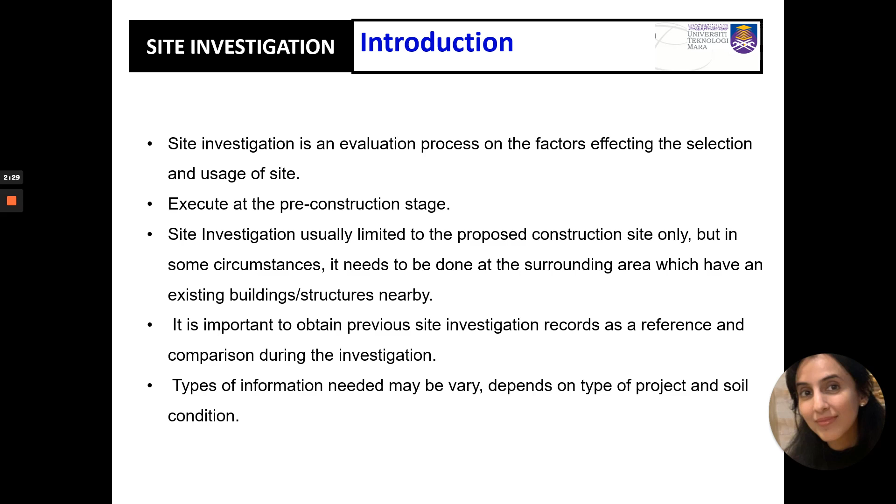The importance of site investigation is that it tells you the actual condition on site. When you visit, you will know the problems on the site, and you can foresee what needs to be done so that you don't encounter the problem later. So you identify all the problems at the beginning so that you can solve them.

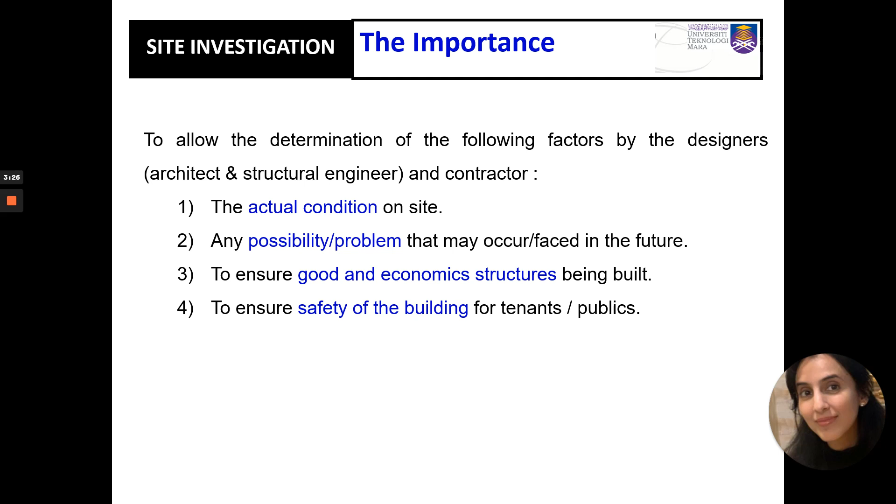This is to ensure a good and economic structure is built, and to ensure a safe building for tenants, the public, and the stakeholders. So when you build something, you need to consider whether it's safe - the ground, whether you have high water tables, and so on.

The objectives: firstly, you need to know the suitability of the site and the environment for the proposed works, including implications of previous use or contamination. So if the site has been used before, maybe for plantation, you may have contaminated land or soil. So what needs to be done? You need to understand that when you visit the site.

A very simple example I can give is, our parents sometimes want to buy a piece of land to make a garden, plant durian trees - musang king, or maybe duku trees. So to plant durian trees, you need to know whether the site is suitable. You go and buy a piece of land at a developed area, maybe near a housing estate where there's one empty lot. You want to buy that. It's a residential lot, but you go and plant durian trees there.

It wouldn't be wise for you to do that, because the first thing is the title of the land. Then later the neighbors will have a problem. When you have a garden, you will invite many animals - you will have snakes and all those sorts. So it may not be suitable.

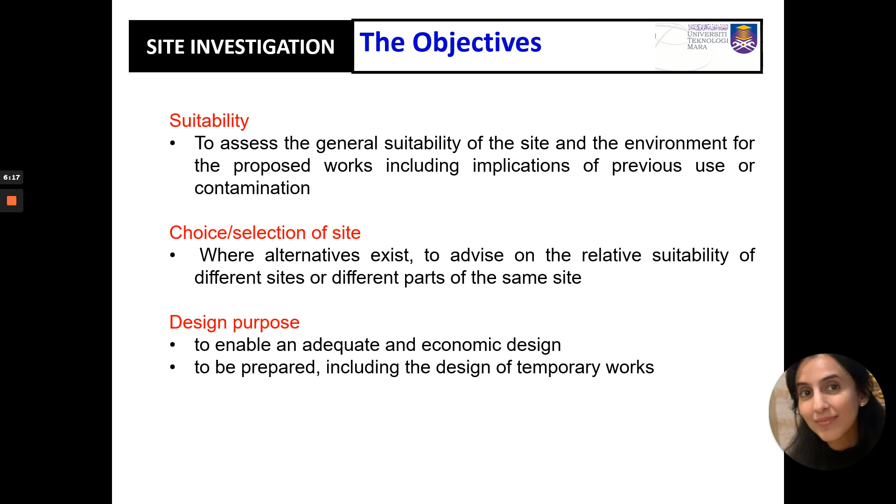Construction methods: when you visit the site, you may encounter different types of soil. Just in a piece of land, you may have non-cohesive and cohesive soil, or very highly disturbed soil, like muddy soil. So your method of construction will be different, like excavation, as I explained in the previous chapter. Excavation for non-cohesive and cohesive soil may be different, as I've explained.

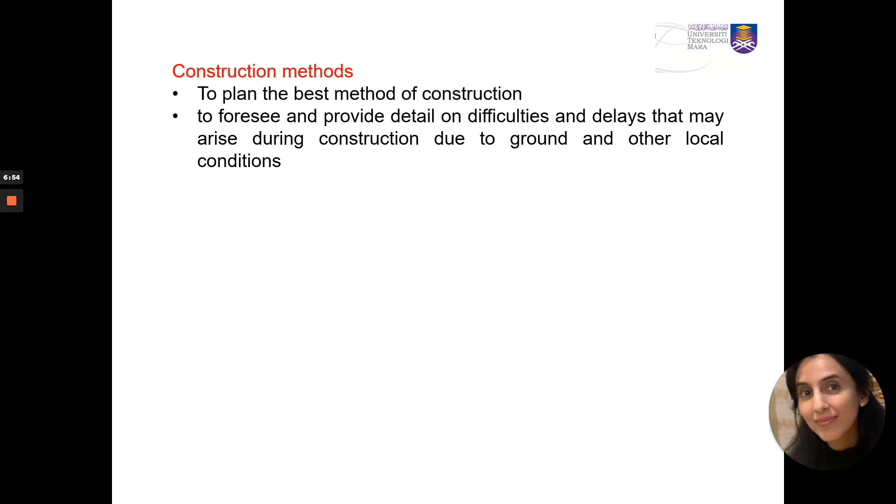Determine effects or changes: to determine the changes that may arise in the ground and environmental conditions, either naturally or as a result of the works. So if you do something, that project may cause a landslide, for example. So when you do excavation, do you need extra work because your site is a bit hilly? If you make a slope, do you need slope stabilization for that site? Whatever you do now may result in changes later, so you need to identify that, and the effects of such changes on the works around you and the environment in general.

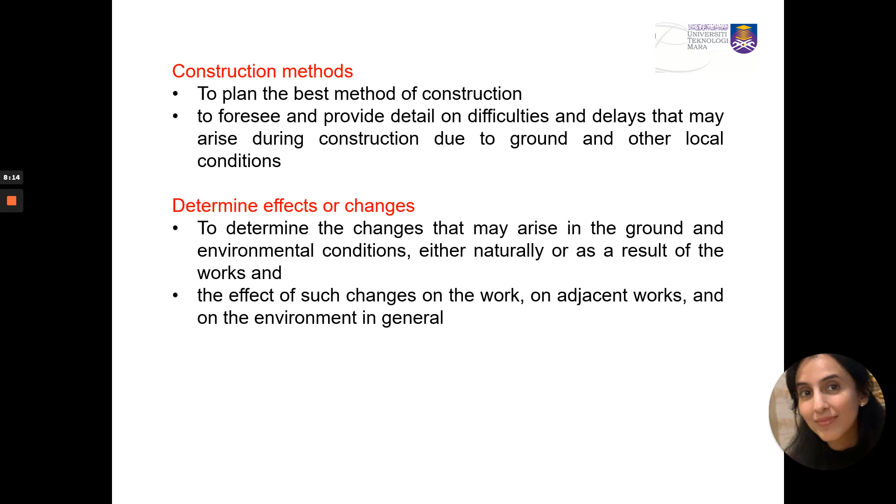So if you do a project, would that disturb your neighbors? For example, if you do an agricultural project and build a goat pen, although it's far from other people, would that disturb the neighbors or the adjacent farms? You need to see all that.

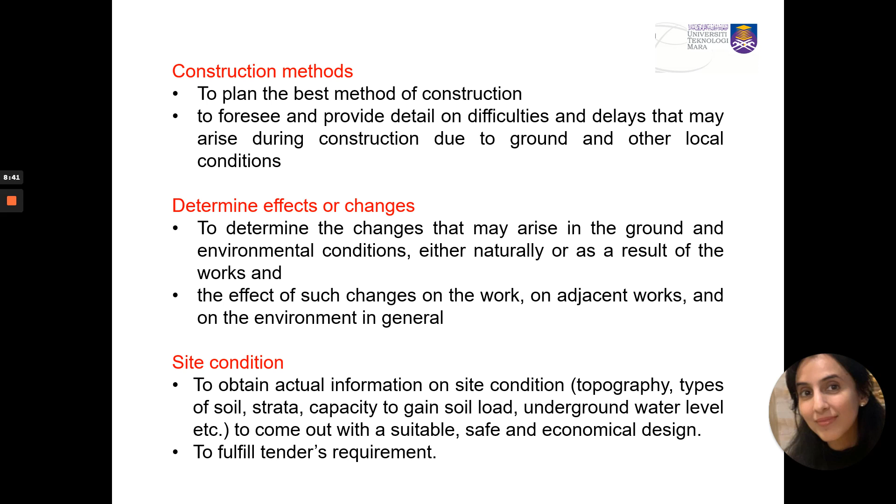Site condition: the topography, the types of soil, the strata, the capacity, underground water level - that has to be done. Soil investigation is normally done after the site investigation, but during site investigation you can have a rough idea. Go and visit, and you can see whether it's sandy or cohesive.

If you don't do a proper site investigation, the first effect you may have is failure on the structure. You may have cracks on the wall because of settlement, where the ground sinks on one side - we will learn this more in soil improvement. If your soil is not strong enough and you build a very big structure above without proper foundation, your building may collapse or crack. If you didn't recognize there was a river underneath your site and built a structure, the same thing may happen.

A structure which is almost complete may need to be demolished and rebuilt. So you've finished building, and suddenly you find something isn't suitable. In the old days, they could actually lift the house because the foundation was just above the ground - that was a traditional house. But now we're talking about things where you've done the piling, and suddenly find out it's not suitable. There were several cases like that when they did piling because they didn't do a thorough soil investigation.

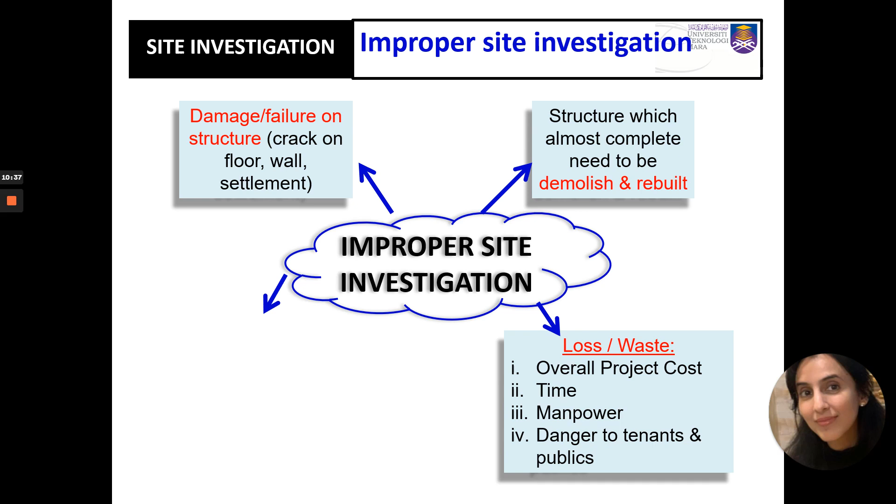So the piling becomes unstable, resulting in lost or wasted overall project cost because you have to demolish it. Then you realize you need to do more work, like diverting a river, requiring more time, manpower, and creating danger to the tenants, the public, and stakeholders. And it creates social problems.

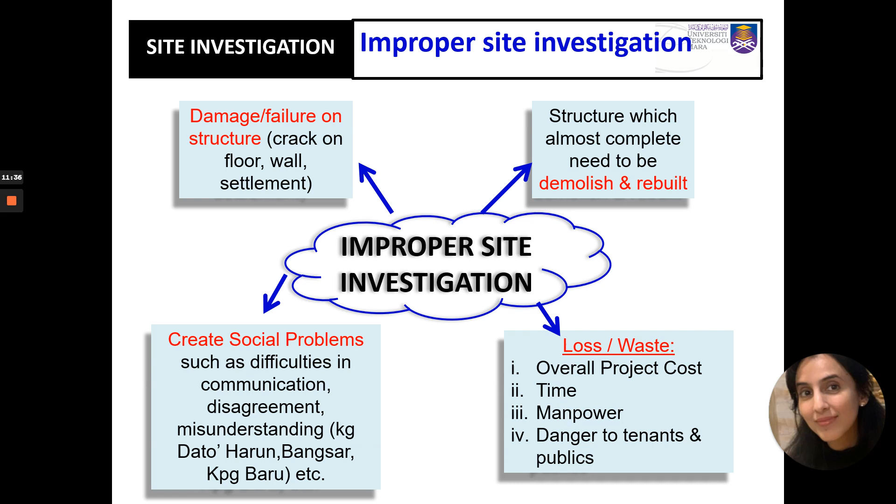This is what happens when you don't do a proper site investigation. So what needs to be investigated during site investigations? There are about 9 elements - you may have more or less depending on the situation, but I'm only touching on 9 of them.

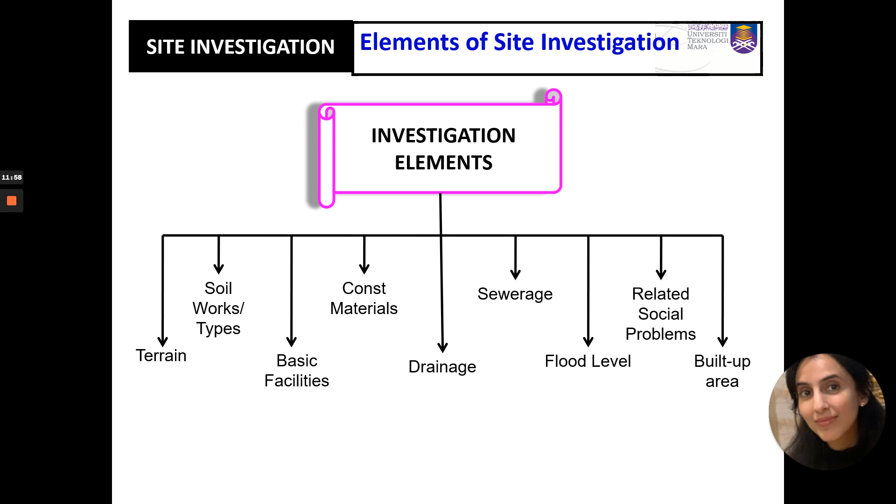The first one is the terrain - it shows you the shape of the land surface, whether it's flat, hilly, or swampy. It gives you an overall picture of the infrastructure works that need to be prepared before construction commences on site. If your site is a bit hilly, you need to provide several things on site. The site can be defined as flat, meaning you may have a 0 to 3 percent gradient - it's not sloped, it's flat.

Or it's hilly, more than 25%. Or you can have a piece of land at a developed area where the earthwork is already done, like with the MRT. When they did site investigation, MMC Gamuda did all the initial site investigation, but when the selected contractor came in, they went to visit the site during the tendering process. By then, the site they visited had already been flattened.

Sometimes the terrain of the site can also be described based on factors like being full of trees, having a river, or being rocky, like near Puncak Iskandar. If you drive through there before you graduate or take your degree, though now during corona time you're not actually here, if you go a bit further up towards Parit, you can see rocks on the site, brown in color.

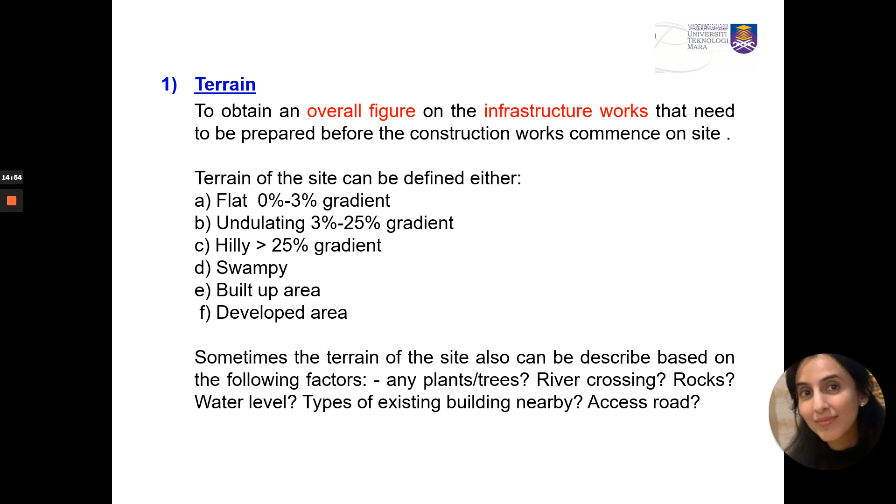Existing buildings, for example, if you go to Institute Latihan ILD, or UITM in Kampung Gajah, on the site they have new buildings and old buildings. So for existing buildings, when they got that site for the institute, they already had existing buildings there. They only use part of the land to conduct trainings for us, but there are parts of the land they don't use. You can see some old buildings demolished, some in really bad condition because they don't use those old buildings anymore. So you can describe the terrain that way as well.

The second factor is the types of work. The first thing you've seen is bentuk muka bumi, the shape of the land. The second one now is the types of work. So when you go to the site, it's important to determine the type of soil on the proposed site, whether it's sandy, rocky, swampy, watery, has abandoned mines, or very muddy.

So when you go to the site, you can discover this with your own eyes, mata kasar. Examples of considerations you need to take: whether it's a big project, whether your project is really huge, so you have to visit thoroughly, and you need specialists and geologists. You need to do soil investigation, a preliminary soil investigation.

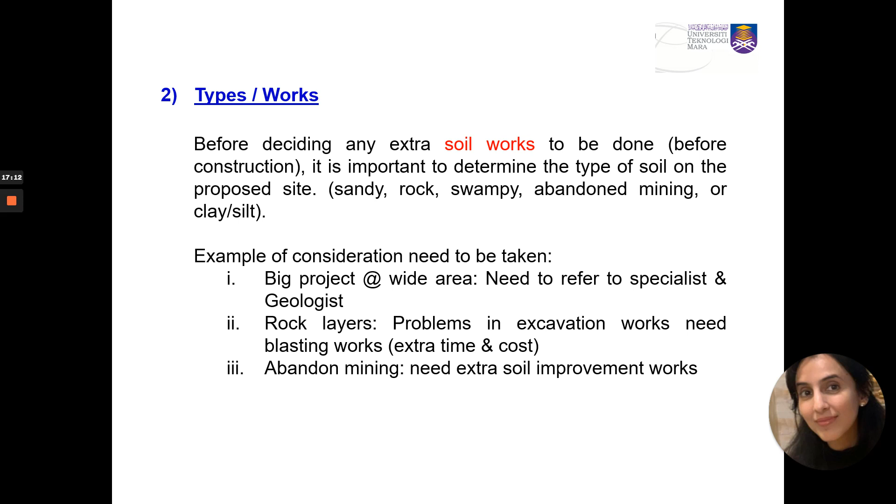Then there's the rock layers, which are a problem in excavation work. You may need blasting, different techniques, or you may not be able to use dynamite because of the surrounding areas, so you need to check. Abandoned minings, lumbung-lumbung, like around this area in Ipoh, we still have in Tronoh mines that people use for fishing ponds. We still have minings, and this needs extra soil improvement works. I'll touch on this more in the soil improvement topic, not here.

Then the types of work also includes the method of construction, to ensure that new construction work is safe and will not affect the nearest existing buildings. I've mentioned this before: workers and the public, factors affecting safety measures, soil excavation.

So when you do excavations, you need to see many things to reduce the risk. Vibration - when you do piling, we have vibrations, and when you have vibrations, the ground will have movement, and buildings around you will also get the vibration and may get cracked as well. Underground water can hit your foundation and make your structure very unstable on the ground, and it can collapse. That's what happened to the Highland Towers in Ulu Klang long time ago.

And you need to see whether the methods are suitable for the proposed site. Maybe your site is small - later when we learn about basements, we have different types of excavation depending on the site itself. Kalau kecil macam mana, kalau besar you have space, you can make a slope.

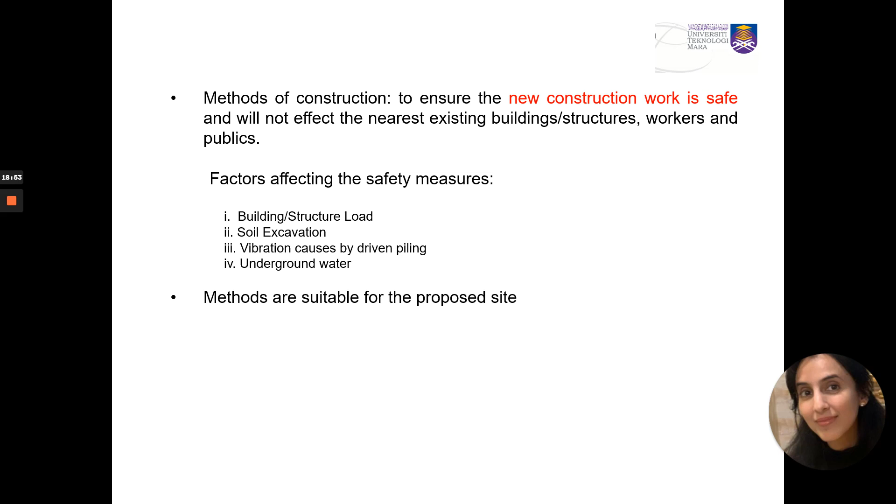Kalau kecil, you may not have space, you cannot do the slope. So choose methods that are suitable for the proposed site. You need to see your site, and you can actually have a rough idea when you do your site investigation.

The third thing you have to investigate is the basic facilities. Access road - this is very important. Is it available, or do we need to construct a temporary one to the site? If you have an existing access road, then it's good for you.

But if you don't have an existing road, you need to construct temporary ones, and then you need extra cost for that. Kalau selalunya nak buat kebun sebelah-sebelah dalam, you need access road. Sometimes you kena cross orang punya land, because nak masuk land yang reserve kerajaan, it's so far away. You need to turn like miles away to get into that reserved area, maybe susah. So you nampak ada jalan yang kena cross orang punya tanah. So you have to check.

Types of road - whether it's a paved road, or just laterite, or you only have a very rough access road, pakai crush and run. Factors need to be measured to estimate an overall cost for road works.

How long is the distance from the main road, ataupun from the road that is paved, to your site. This is crucial because if you have lorries, macam concrete lorries, to send your materials to the site, just imagine how long they have to transport the material. It will affect your cost.

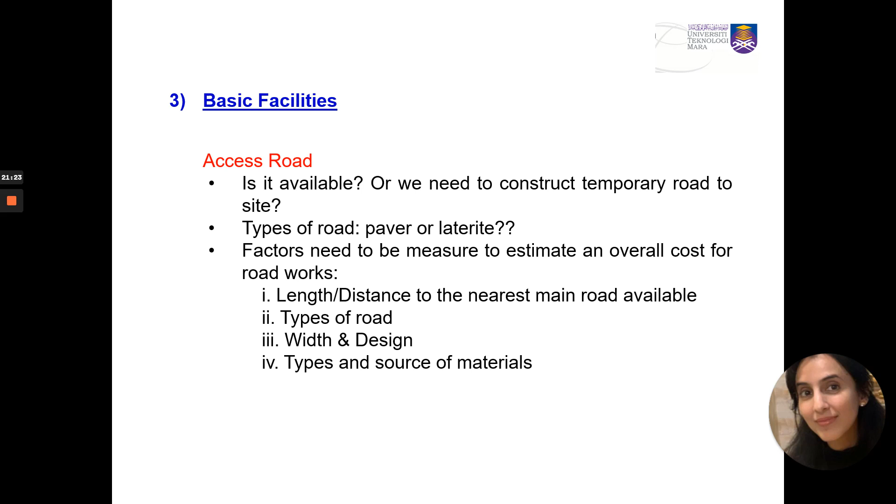The road from the main road to the site was only about 30 kilometers or something like that, he mentioned to me. But it took them hours to get to the site because of this type of road. It looks okay, but when you are on the road, it's bouncy. It's like you can't really drive fast. So they had to drive really slow, and it took them about 2 to 3 hours to get to the site in Sarawak. So you have to look at this.

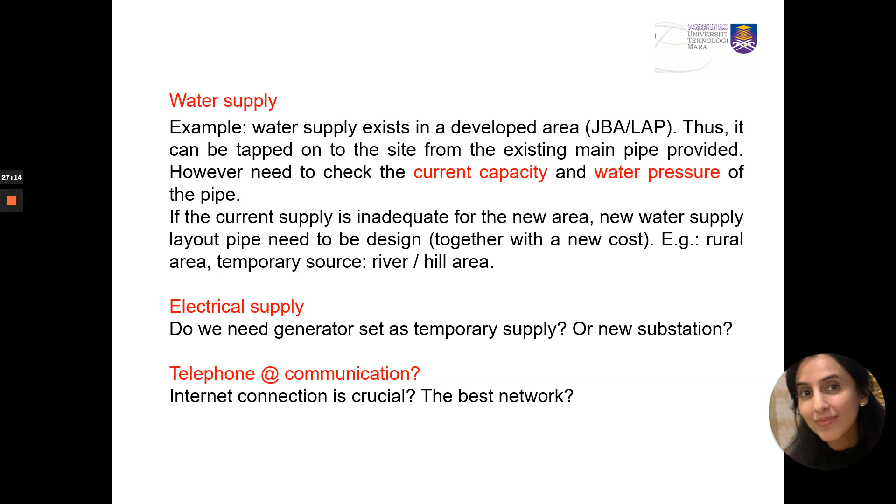So if your site does not have a water meter, you need to tap from your neighbor. You need to find your neighbor, you need to go and talk to your neighbor. They may request their water and electricity bills from you, like my mom's farm. We were the last to have electric and water supply.

So about a year ago, we had a new owner who leased the land behind, a China company. So he needed electricity and water. He came and saw us, asked can we have your bills, because TNB and LAP needed them. So we gave them our bills, and they actually pulled the water and electric from our last point.

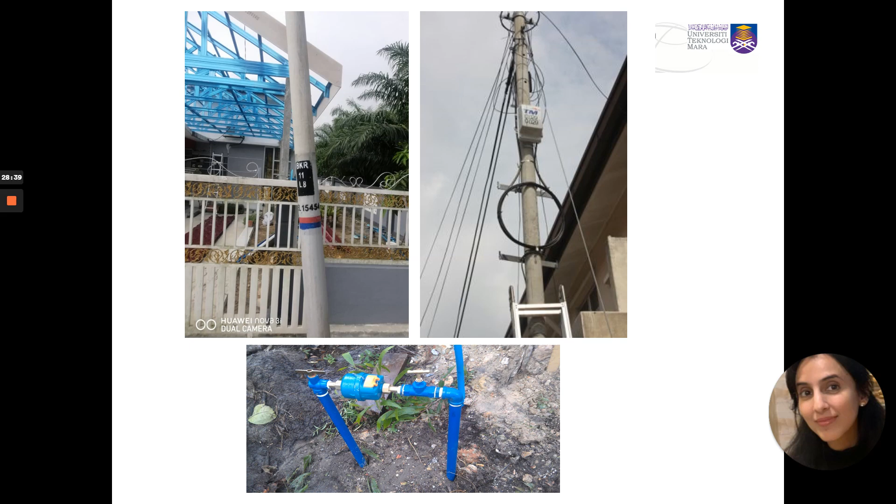Existing works, I've mentioned just now. If you have existing works, like I said, Kampung Gajah, Institute Latihan UiTM di Kampung Gajah, so they already have existing buildings. You need to investigate previous defects or failures that occurred on existing buildings. It is important to know the reasons of failures for better precautions and improvement in future.

So let me tell you a story. I was a core volunteer for Mercy Malaysia back in 2006. At the end of 2006, they sent me to Pakistan to do an important mission, because they had an earthquake.

This happened near Kashmir, Azad Jammu Kashmir, up near Bagh. When they had the earthquake, most of their buildings cracked and collapsed. There was a high mortality rate because people were harmed by collapsed buildings, rocks and all. I was the only lady from UiTM in Perak involved in this project. So we went there to build a new district health office.

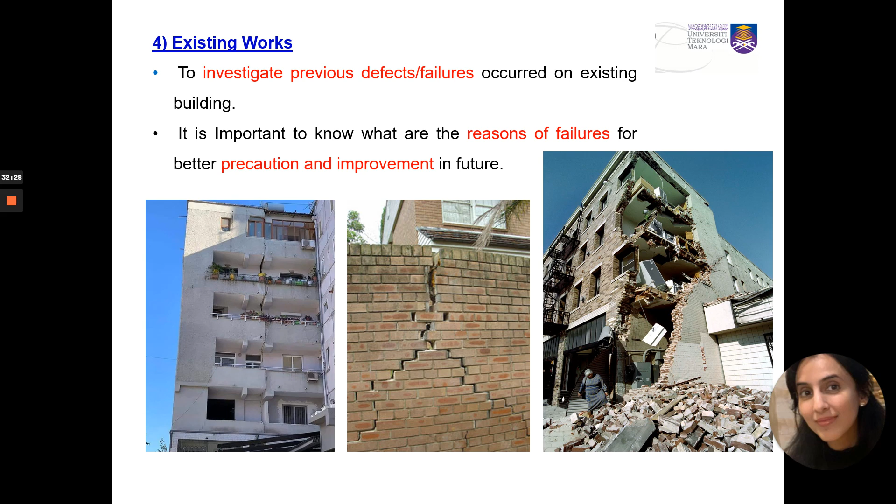Construction material. So when I did site investigation in Azad Jammu Kashmir, because it's at the top, from below we had to go up, it took us hours, I don't remember how many, but it was very long, and the road was very narrow.

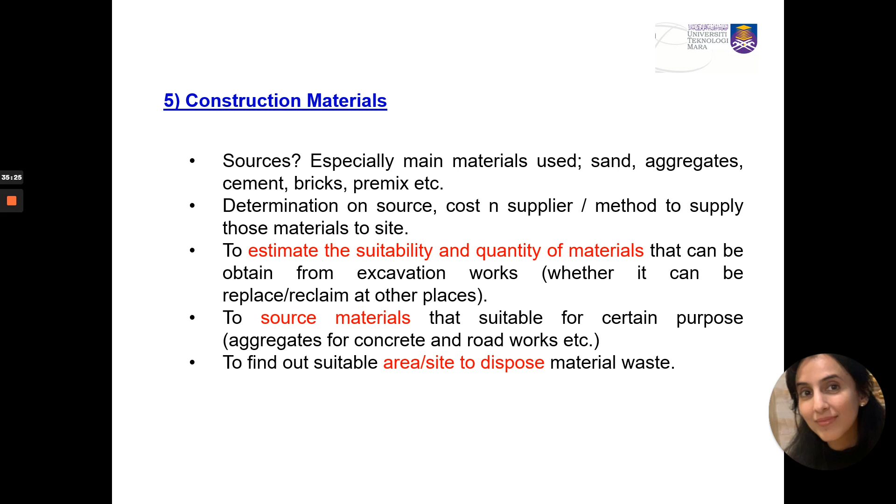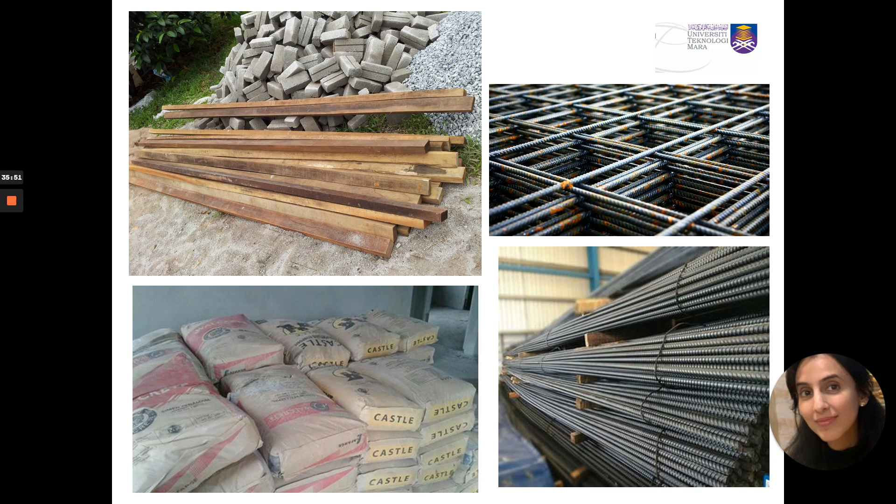So these are three main important materials in construction works. The first one is cement, and you have the aggregates, reinforcement bars or BRC, wood, bricks. So it depends what actually your project is all about. If you want to build a warehouse, maybe you won't use wood much, you'll use a lot of steel structure.

Drainage, this is also very important to determine how to flow water off site. Otherwise your site can suffer from flood. Is there any existing drain nearby? Can you connect your drainage system to the existing monsoon drain? For example, what is the nearest river to dispose this into?

I have seen several sites where, when they did construction works, they didn't have proper drainage. The site itself flooded during construction. Then only they scrambled to say the depth isn't enough. Whereas actually the flow of water didn't reach the river, their drainage system wasn't good.

It's the same thing. My students previously did an assignment. They did a small research between Penang and Terengganu or Kelantan. It was Terengganu, I think. So they found out that the drain in Terengganu or Kelantan, I can't remember which state...

They investigated and found out that the drainage in Terengganu was very poor because people there had their own individual piece of land. So when they had their own land, they built their own kampung houses, but they didn't build proper drainage.

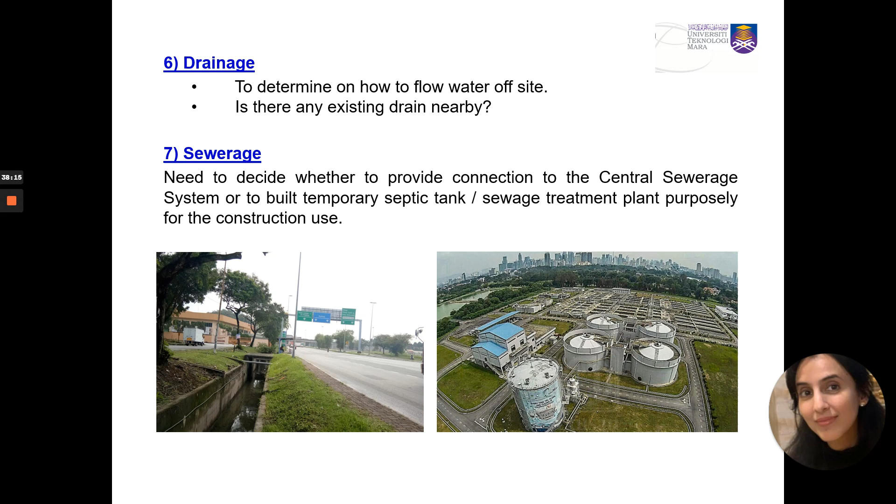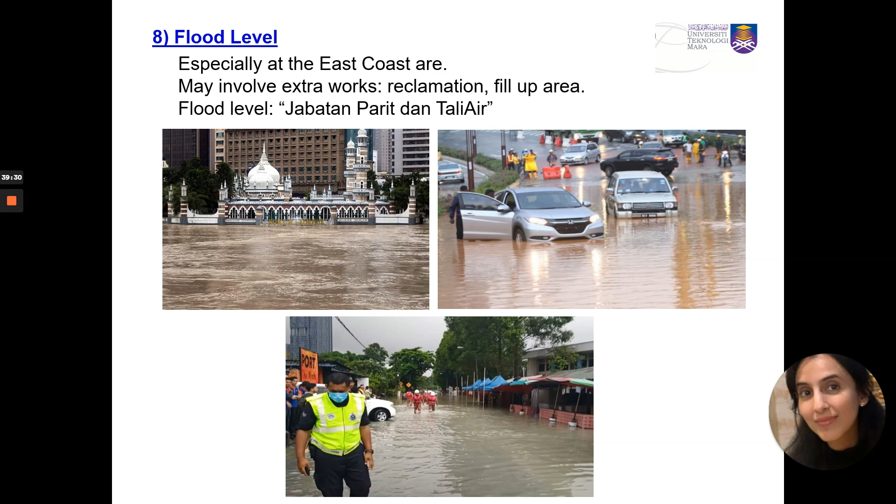Okay, related social problems. For example, in KL you have squatters who protest development in their area, like Kampung Baru that they mentioned. You may have so many kinds of social problems.

For example, my friend was a project manager at a construction site in Klang Pandamaran, an area with quite many issues. He said almost every week he, or the site, had to pay pocket money to the gangsters. Otherwise the gangsters would make lots of issues, theft, and even burn the front gate.

So they created so many problems, and my friend didn't want to keep paying them every week. So my friend went to meet the head of the village, the ketua kampung, and told him this is the problem in this area, we need to sort this out. It turned out the ketua kampung was also part of the gangsters.

So they had to negotiate. They paid a sum of money to the ketua kampung after negotiation, and after that there was no more disturbance.